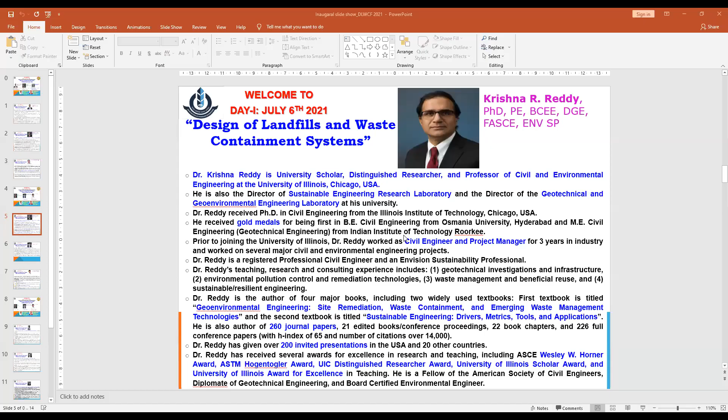So yeah, presently I don't have permission to share the screen. So maybe you will have it. Okay, you are sharing the screen. Okay, yeah, I'm sharing the screen.

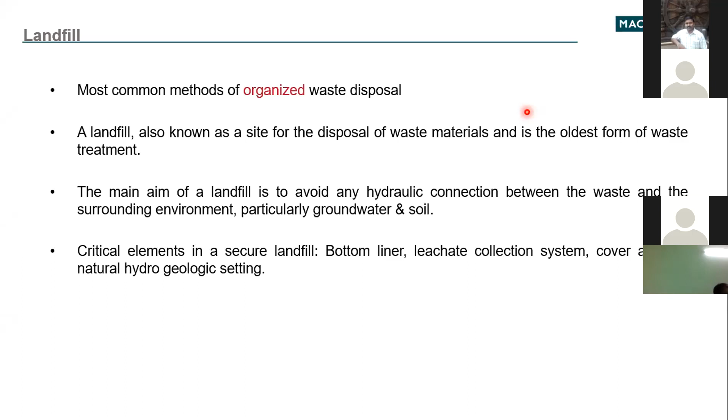Typically, you would have a bottom lining system, a cover or top lining system, and a collection system for the liquid generated in the landfill, typically referred to as leachate.

As you put this solid waste in the area, you will also require temporary covers. When dumping solid waste, you may not achieve the total height in a short period of time, but over a number of years. So between layers of solid waste dumped today, tomorrow, over a week's time, once you attain a certain height, you may cover it with soil daily so that odor does not come, especially if you expect working during monsoon, because during monsoon we cannot stop the waste from being generated—it is continuously generated.

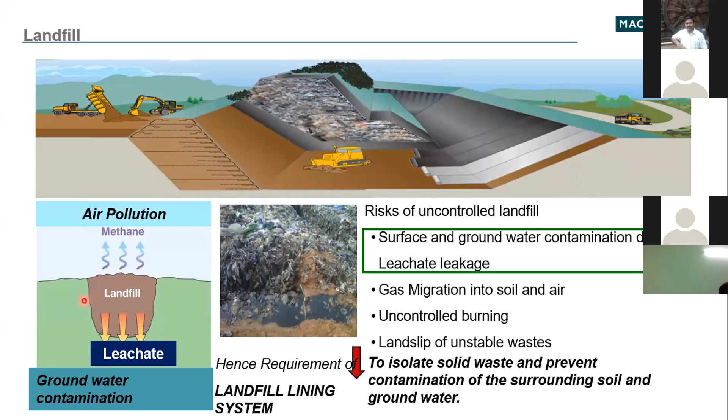So these kinds of risks are always there when we are doing uncontrolled landfill. So how do we look at this landfill, and how can we control the movement of these liquids, gases, and keep them in a controlled environment?

I would say the waste is getting confined in a particular place. So there could be a cap barrier, top lining, or top cover. So basically you have a landfill, you have a base barrier, here you are putting the waste, and then you are putting capping. The capping could be temporary or permanent. Once the capacity of the landfill is over, then you put a permanent top lining. When you are filling this landfill routinely, there you will have some temporary covers.

So the purpose of this top lining system is basically to control the moisture infiltration in the waste, which could be probably due to rainfall. It also collects the gas, because once the landfill is sealed and a top cover is put, it will generate a lot of gases. It collects them, prevents odors and sources of disease. Once you have the top cover, you control the bad odor getting spread, and it is contained in the landfill itself. It also meets erosion, aesthetic, and other functional requirements. Once the landfill has exhausted its capacity, you put a top lining system, and we may put some greenery on top, or develop recreational facilities. So that could be the requirement.

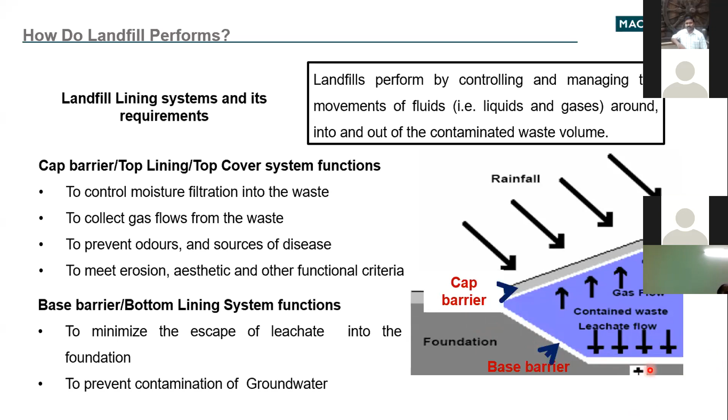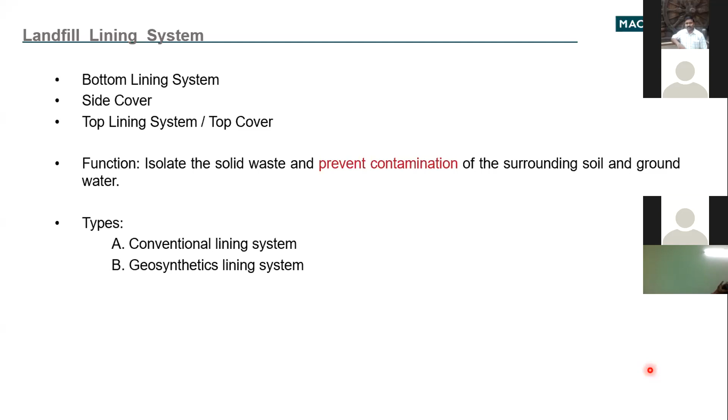The bottom lining system's purpose, of course, is to minimize the escape of leachate into the soil or foundation layer, and prevent contamination of the groundwater. So you can say there's a bottom lining system, side cover, and top lining system - these are basically three types of lining system. And here you can have a conventional lining system, or alternatively a geosynthetic lining system.

So why these geosynthetic materials have been used is basically because it is noticed that they are easier to handle, and low cost installations are possible. They are of higher and constant quality.

Just to give an example, if we talk of a clay liner, you will need to have consistency of the clay throughout the landfill. And you know, the clay we are going to get is a natural material, and we will be borrowing it, so there are processes involved. For that, of course, you will need to ensure the quality, consistent quality.

Whereas if you use alternative materials which are factory made, they are produced in a controlled environment where you can check the quality routinely, and you will get a constant quality throughout the production.

Then of course, when we have these landfills maybe near soft soils, or let's say coastal areas, areas prone to settlements, this provides good resistance for settlements. Overall, you can say you can even increase landfill volume - that I will cover in the reinforced soil structure, how we can increase the volume of this landfill. And then of course, because of the reduction in consumption of natural materials, you will have a reduction in the carbon footprint as well.

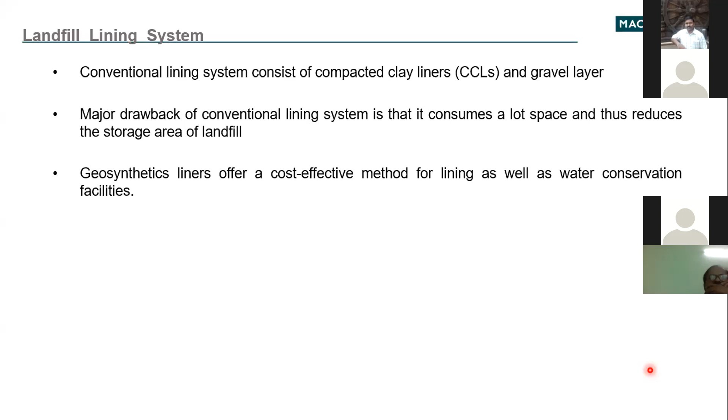These geosynthetics, of course, offer less thickness, so you have a good amount of space being utilized for additional volume of the solid waste.

This geomembrane is basically a membrane made from high density polyethylene, which is produced from crude oil. You have crude oil which is processed to get the required fuel, and the rest of the part is processed further, giving you different polymers like polyolefins, including high density polyethylene. So basically it's an engineered plastic sheet, and it comes in a thickness ranging from 0.75 millimeters to 2.5 millimeters. Typically in landfills, the minimum thickness goes up to 1.5 millimeters.

Some countries like in Europe, they go for minimum 2.5 millimeter geomembrane. On top of that geomembrane, you will have a protector layer. This geomembrane is a plastic sheet, so it is quite possible that it may get punctured.

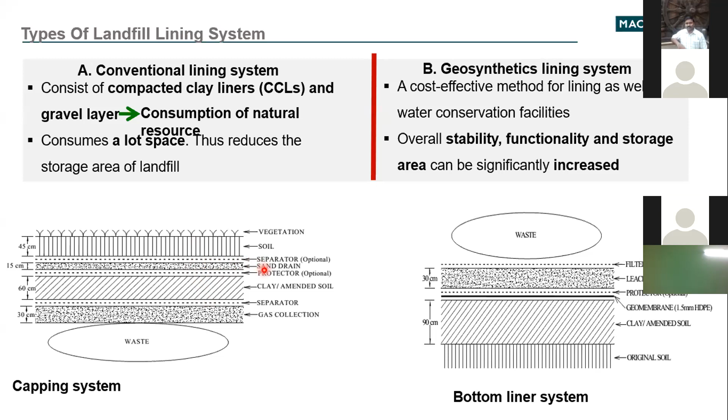The purpose of this soil is to promote the growth of vegetation, and the purpose of vegetation is to stop the erosion of the soil. So to stop the mixing of the sand, the soil, and the bottom clay, you will again provide a separator there. This depends on part of the design, but this is really a nice combination. If you provide this, you will have a good capping and bottom lining system.

When we look at what are the alternatives for the conventional layer, from the bottommost, let's say you have a clay liner, typically very low permeability clay to be used, 10 to the power minus 7, minus 8, minus 9, whatever you are able to get, that will be the best suitable, with thickness ranging from 0.6 meter to 1 meter based on the requirement.

This can be replaced by GCL. GCL is called a geosynthetic clay liner. So what is the geosynthetic clay liner? You have 2 layers of geotextile, 2 fabrics, typical textiles, and in between you put bentonite. The bentonite that is put inside is a very specific bentonite, typically a granular bentonite having good swelling characteristics.

So the thickness of the GCL can be at max, let's say 10 millimeters, not more than that. Then you have a geomembrane layer, as I explained, 1.5 mm, or as per regulation it could be 2.5 mm, followed by a protector layer. Typically, you may put a sand layer, or better, a non-woven geotextile.

A non-woven geotextile of good thickness would provide good cushioning, so that the geomembrane is protected, followed by a leachate collection layer of typically 1 foot. This can be replaced by a drainage composite, which I will explain further.

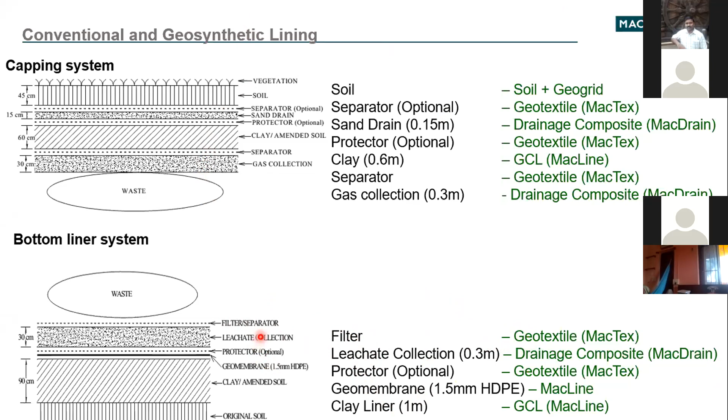Now when it comes to the lining system, what we typically call the bottom lining system - sometimes people refer to it as a simple or single lining system. These single or simple lining systems are typically used for low vulnerable sites, or pre-treated domestic waste, where you segregate the waste and treat it somewhere before disposal.

Whereas the other system is called a double lining system. Here you are providing two sets of linings, and these are used for vulnerable sites, untreated waste, or hazardous waste.

For example, industrial waste - say an aluminum refinery processing bauxite generates red mud, which is very hazardous. If you want to contain such material, you may go for a double lining system to ensure no hazardous material seeps into the ground causing contamination.

That's what a vulnerable site means - a site where you expect movement or settlement, or you're unsure the lining will stay intact for a longer time because of the terrain or geology. In such cases you may go for a double lining system. So you have a choice between single or double lining systems to put in place.

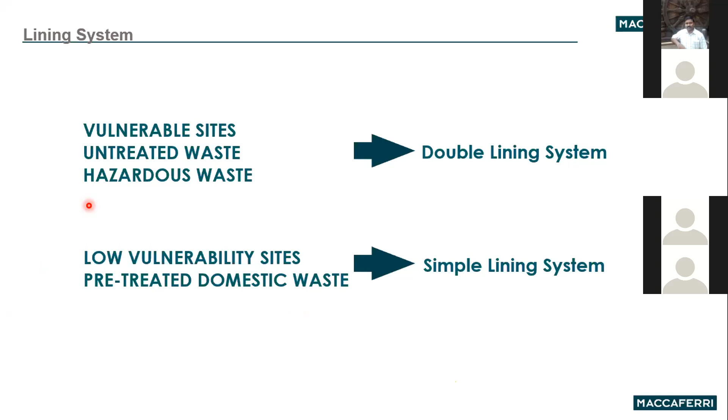When you look at the landfill, there are various requirements where geosynthetics would be used. First, of course, is waterproofing - meaning you don't want the leachate to go down. Second would be leachate drainage, as we discussed with the drainage layers, using geosynthetics as alternative materials in these drainage layers.

Protection and separation - this means geomembrane protection and separation, protecting whatever geomembrane you put in to contain liquid from any damage, using geotextile. Filtration is another requirement, where you want to filter the leachate so only the liquid passes through, using a gravel layer or drainage layers to handle this filtration purpose.

Sometimes you don't have much space for the landfill, because on top of a landfill you'll typically have a very flat slope due to the characteristics of the waste itself. If you provide a steeper slope instead, you may need solutions for retention of the solid waste. That could be one more requirement.

Or you are in a very poor site condition where you want to improve the site's geological characteristics - you may use geosynthetics for that too. So for all these applications, you can use geosynthetics.

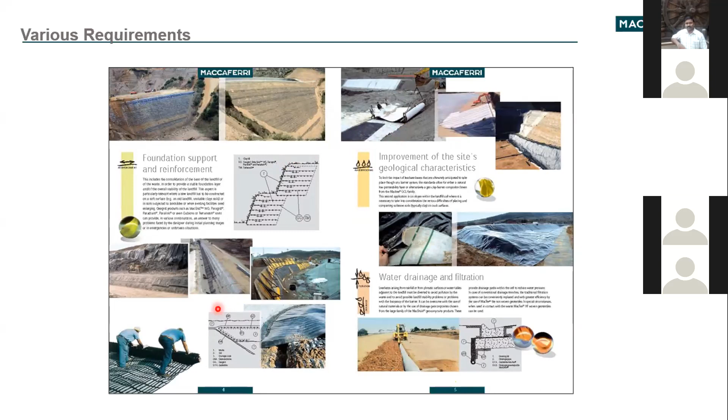According to European standard, when we look at the capping system, it consists of a vegetation cover, a drainage layer, a low permeability barrier layer, a biogas layer for collection of gas, a leveling layer, and the waste itself. So this is typically a capping system.

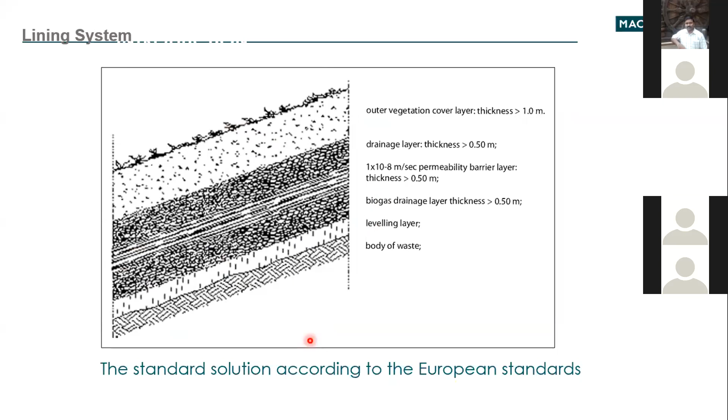If you look at this drainage layer plus the gas layer and the top vegetation, the thickness could be around 1.5 meters. Whereas if you use geocomposite drains and GCLs, you may achieve a thickness of just 0.03 meters - saving almost 1.5 cubic meters of space per square meter of surface area.

You can say you are saving, or creating, space - whatever way you want to put it. One of the challenges you can ask any municipal corporation is how to handle this waste and how much waste can be handled in a minimum footprint. That is one of the requirements, and with geosynthetics you can create greater space within a given design.

Now let's look at the bottom lining and the drainage, as well as the reinforced soil. Let me switch over to the other presentation.

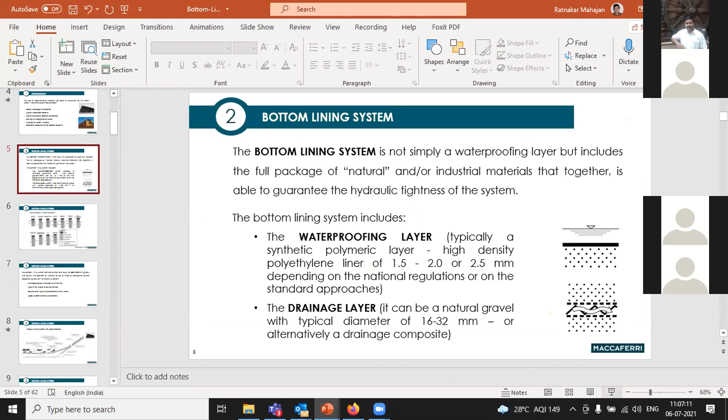Okay, so here I will be touching on the bottom lining system, drainage layer, and the reinforced soil. Just to give you an idea about the different bottom lining systems practiced in Europe as well as, you can say, USA.

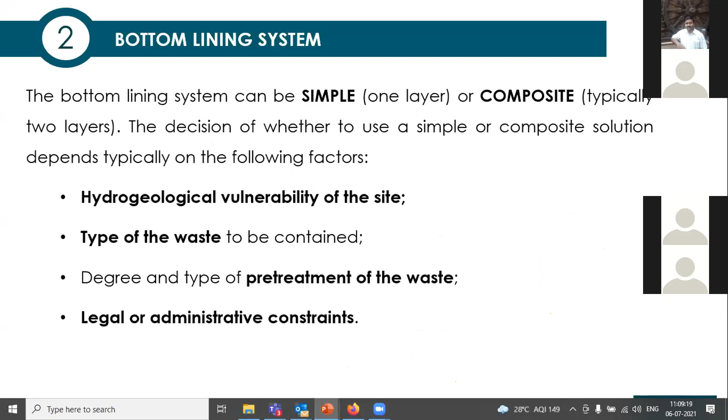So if we have to look at this bottom lining system, you have a waste, this is the bottom portion of the landfill. You have a clay layer, thickness could be 1 meter. Clay on the flat surface is fine, you can easily compact it. But when you are going on the sides, which could be at an inclination, how can you compact this clay? It's very difficult.

So they can be replaced with this geosynthetic clay liner, GCL, typically referred as GCL, which can be placed on the slopes very easily. The geosynthetic clay liners come in a roll form, and typical weight of these GCLs could be around 4 to 5 kg per square meter. Because of such high weight, the length of this roll is typically around 50 meters, and width could be around 2 to 4 meters, depending on the site requirement, but usually it could go as wide as 4 meters. So in this you will see there are two dotted lines, top and bottom, these are nothing but the geotextiles, and in between you have the bentonite being placed in.

So you have this geosynthetic clay liner. Then the solid black line, what you see, is nothing but a geomembrane. The purpose of this geomembrane is basically to form a barrier for movement of any liquid inside this clay layer or GCL. These geomembranes are made up of high density polyethylene, and they also come in the form of rolls. The width of this roll can vary from, let's say, 4 meters to 7.5, 8 meters. Now manufacturers have come up with very wide rolls up to 7.5 meters.

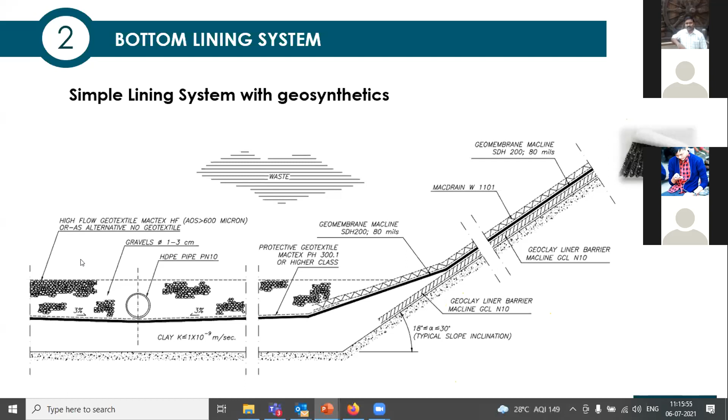So the purpose of the drainage layer in the simple lining system is to convey the drain or leachate. The HDPE membrane, basically not less than 2 mm, or 2.5 mm in Europe, has the purpose of containing the leachate.

And typically the clay layer, or mineral layer of low permeability, is 10 to the power minus 9. The purpose of this is basically to form the first barrier between the foundation soils and the solid waste.

Now let's look at the composite or double lining system. So you have exactly the same thing as the single lining system, with the clay layer replaced by GCL on slopes. You have a geomembrane, followed by a geotextile, and then basically a geocomposite drain.

The double lining system basically repeats the whole combination one more time. So a layer of GCL, a geomembrane, a geocomposite drain. Now the purpose of this additional layer of drainage and membrane is basically that even if one liner gets damaged, you will have a second assurance for controlling the leachate.

So the thicknesses, as I explained, will be more or less the same, no change. It's only that two layers are being put, and the purpose of the second geocomposite drain's bottom layer is basically to check or detect any failures in the first lining. So is there any failure there?

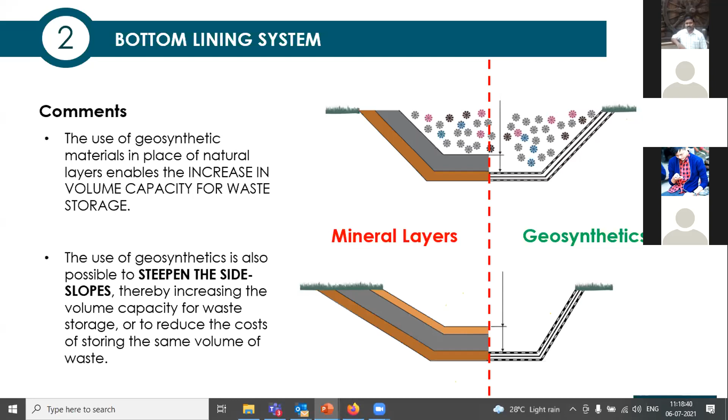There are many experimental and site experiences that show that when you use non-woven geotextile, which is randomly placed fiber, versus woven geotextile, and when we use these geocomposite drains in contact with solid waste, typically these non-woven geotextiles tend to clog.

Whereas if you provide woven geotextile for the drainage composite, they perform better compared to the non-woven ones. That is what experience shows, and this is a very important part which usually gets ignored by most people due to ignorance or not knowing the subject. For use of this geocomposite, you must use polyolefin-based materials only, because they have good resistance to acidic as well as alkaline conditions. Since there will be very aggressive conditions, polyolefin is preferred.

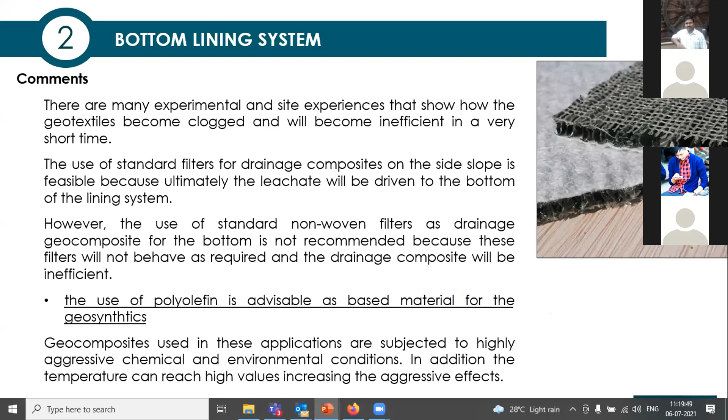Now coming to the drainage composite, I want to touch upon some detailed parts of it—specifically how a 0.6 meter thick, or maybe 2 foot thick, drainage layer can be replaced by only a few millimeters of drainage composite. How is it possible? Let's go through this.

This drainage composite has three components: two geotextiles and a core. These geotextiles could vary, like one woven and one non-woven. In this picture, you see one geotextile on one side and non-woven on the other side. Here both sides are non-woven geotextile. Here you see a different kind of core—a U or maybe W shape, or a random punched net.

Again, you don't always need two geotextiles—you can have only one geotextile on one side, with nothing on the other side. It depends on the application. For example, if you have a chamber to collect leachate and need to provide a gravel layer around it, instead of that you can use this geocomposite drain with only one side geotextile.

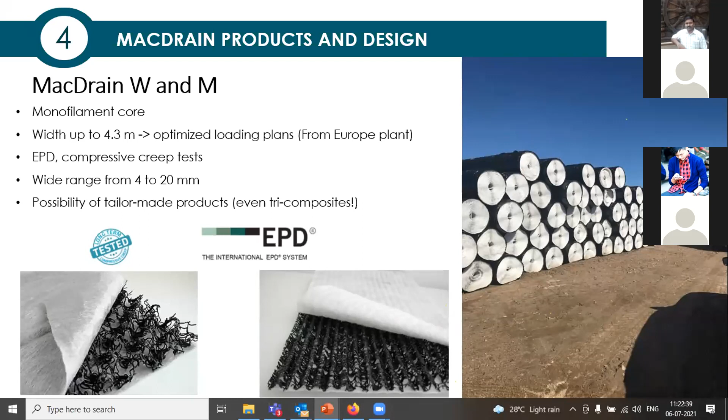So there's a possibility of having a geocomposite drain with permeability on both sides, or impermeable on one side, depending on requirements. They come in a wide range—as explained, around 2 to 4 meter widths, typically coming from European plants. The thickness ranges from 4 mm to 20 millimeters, and this can be customized based on project requirements. During manufacturing, there's a possibility to customize the thickness, the type of geotextile, or geomembrane to be used.

So let's look at this product's design. You have this capping system—let's say you're putting two layers of draining layers, the bottom one for gas and the top one for liquid. You may try to find the amount of liquid that will flow through these layers using a simple equation: KAI, where K is the permeability of the mineral layer, or drainage layer.

You can assume it's, let's say, 10 to the power minus 3, but of course it depends on the type of material used in the draining layer. Then there's cross-sectional area A—for this case, if it's 0.5 meter thick, you can have a cross-sectional area of 0.5 meter square. And I is the gradient related to the inclination of the draining layer, typically called the hydraulic gradient. In case of slopes, that I could just be sine beta, where beta is the inclination of the draining layer with horizontal.

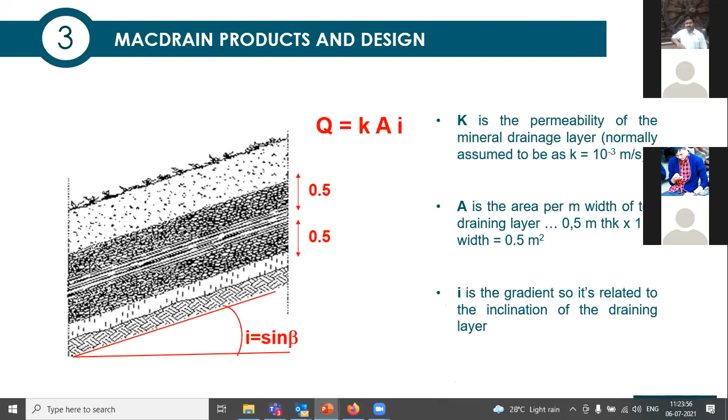Once you know this flow through this drainage layer, we can now design this geocomposite drain. When you design this geocomposite drain, you must understand the water flow capacity, which can be measured in the lab simulating the field conditions.

What are the field conditions? First is this geocomposite drain will be in contact with certain type of material. Let's say you have a geocomposite drain here in touch with a GCL, which is in touch with a ground layer or subgrade, and on the other side a GCL and solid waste. Whereas another geocomposite drain is in touch with GCL, geocomposite drain, GCL, then subgrade, and solid waste here. So you have different stiffnesses and different kinds of surfaces.

Even simpler, let's say you are installing this geocomposite drain on a retaining wall or a leachate chamber. So you have a concrete surface on one side, solid on the other. This is what we call the type of contact it is in touch with.

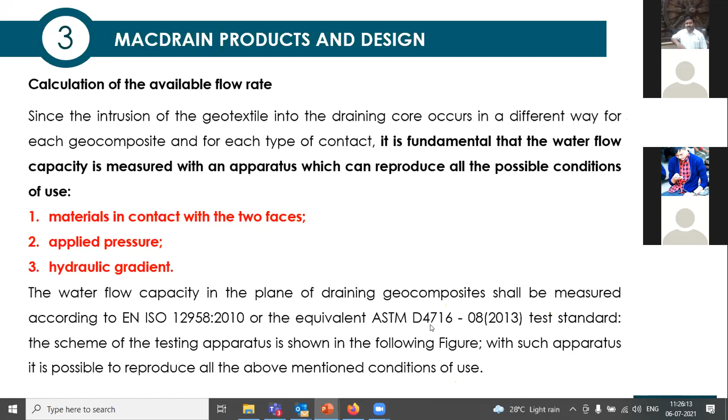So you must be able to estimate the water flow through this geocomposite at different conditions, which can be determined by a test procedure given in EN ISO 12958 or ASTM D4716. So you have rigid to rigid contact, soft to soft contact, and rigid to soft contact - that's the type of contact I mentioned.

When you have a geocomposite drain between two rigid surfaces, this defines a rigid to rigid contact - like a GCD for leakage detection in landfills between two geomembranes. If you have two geomembranes, top and bottom, it could be rigid to rigid contact, or between shotcrete and the structural arch of a tunnel, it could also be rigid contact.

Rigid soft contact could occur if you are using this geocomposite behind retaining walls, or in a capping layer - you have soil, then the capping of the landfill with top soil and a drainage layer, or using it in a roof garden. Soft to soft contact could be draining crates, or roadways, parking areas, different conditions. These different contacts would be there.

This is how you calculate the in-plane flow capacity of the drainage composite. Through this sketch you will understand: you put a drainage composite here to simulate the type of condition. Let's say you are simulating a rigid condition, you will put a steel platen. If you want to simulate a soft condition, you may put a rubber top and bottom.

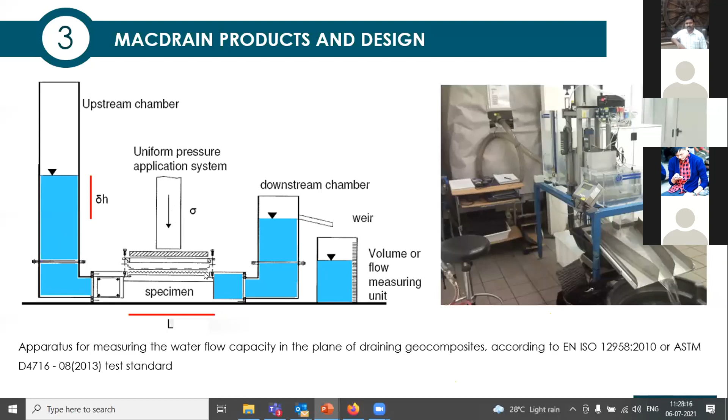Then you have a facility to apply a normal pressure, determined based on site conditions. So you place this geocomposite with proper surface conditions, apply the normal pressure, and then decide the gradient - you know the difference in head, that is delta H, and this L. Whatever hydraulic gradient you want to achieve, you achieve it. You have a constant water flow, achieve a laminar condition, achieve this delta H, and then measure the amount of liquid passed through this composite to get the in-plane flow or water flow capacity of this geocomposite.

This capacity of the geocomposite drain will be different for the same geocomposite at different normal pressures, because it is made of a synthetic material - say 50 kPa, 100 kPa, 150 kPa - thickness reduces at higher pressures, so naturally the in-plane flow rate reduces with increase in pressure. The same applies with the hydraulic gradient: higher the hydraulic gradient, higher the flow through this geocomposite; lower the hydraulic gradient, lower the flow through it.

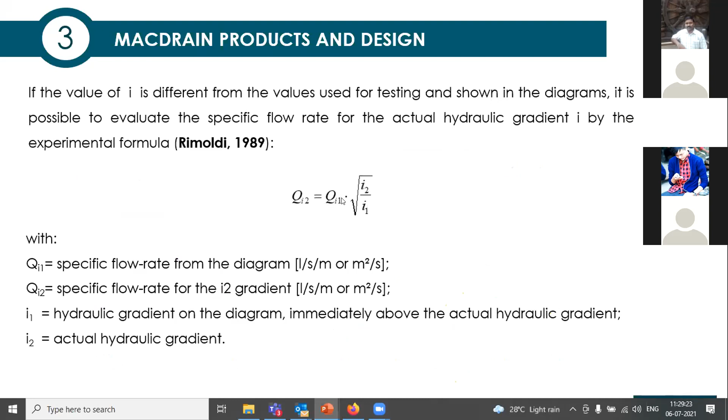Once you determine this flow rate in the field, there's a different possibility of different flow at different hydraulic gradients - still, you don't have to do the same test again. This is a formula given by Rimoldi in 1989. You know the flow for one hydraulic condition, and want to determine the flow for a different hydraulic condition, let's say I2. So you simply take the square root of I2 by I1, multiplied by Q, where Q and I1 give you the flow at the original condition.

When you do the test in the laboratory at 20-degree temperature, if you're testing at a different temperature, you need to apply a simple correction for temperature and viscosity of the liquid.

Now, coming to the very important part, is only this condition enough to test and determine the flow through drainage composite? No, it's not enough. We need to understand this landfill would be there for a certain amount of time, and this geocomposite is subjected to these pressures for that time.

So you need to account for the effect of varied stresses and conditions over a period of time. Basically they are accounted for by reducing the flow obtained in the laboratory. This is QL. Basically you get the flow in the laboratory, and you want to estimate the flow through this geocomposite for a long term, let's say 10, 20, 40, or 50 years. How can you estimate this?

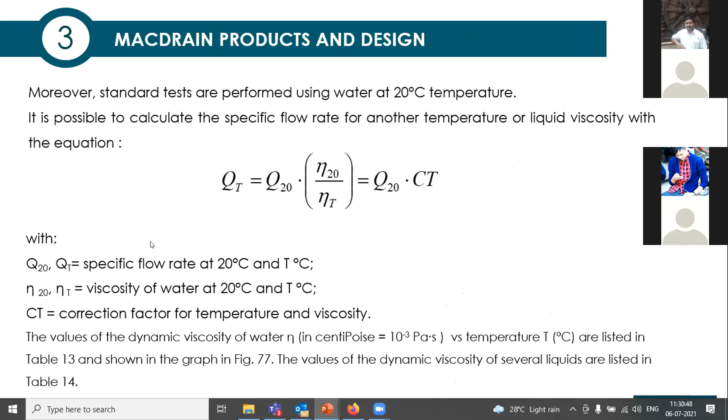So you get a flow through this composite in a laboratory that is reduced by certain reduction factors. That is the reduction factor for intrusion. There are geotextiles, so you have a geotextile like this on the core. It will intrude into the draining core, which will reduce the cross section. So that's the reduction factor for intrusion of a geotextile.

Then there's a reduction factor for compressive creep. This geocomposite will be subjected to pressure over a constant period of time. There will be some reduction in thickness because of the compressive stresses, or compressive creep. That's the reduction factor for creep.

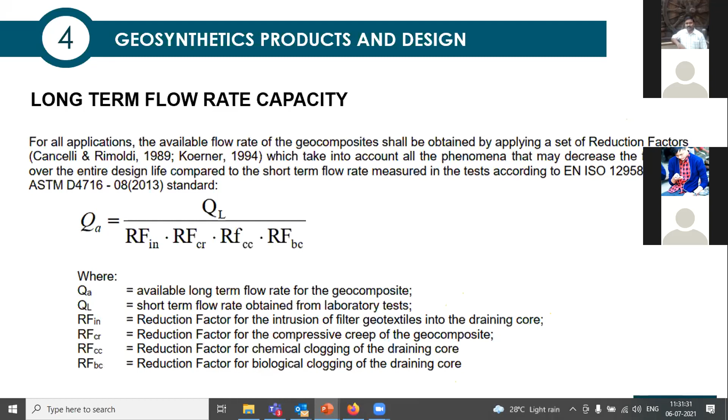Reduction factor for chemical clogging and biological clogging. Because of the leachate flowing through, there are possibilities of chemical and biological clogging. Typically in case of leachate, biological clogging is quite prominent, and it can further reduce the flow. So you need to estimate all these reduction factors by proper testing.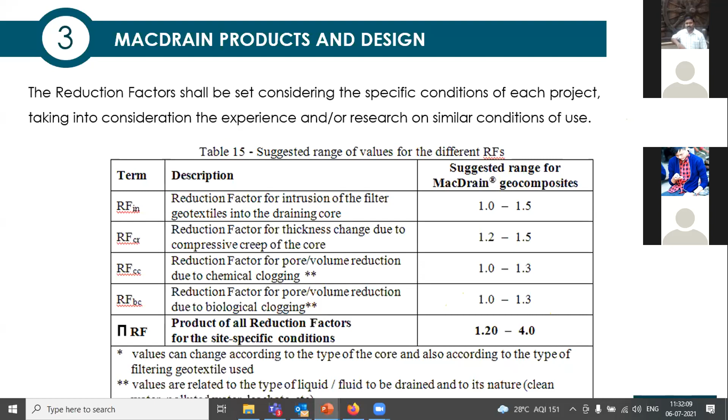You will find a range for this geocomposite drain. There is a very detailed chapter on how the type of core affects the performance of the geocomposite, and the type of geotextile. So you can perform additional crush tests, compressive creep tests to get these factors and decide.

Then you can find out the equivalency of the mineral layer and the geocomposite layer. So you know the flow through the layer that we just calculated, KIA, and you know the available flow in the drainage composite. You can put an additional factor of safety on top of that, and then proceed.

An important part in doing this analysis is the value of this K. A is known, I is known. K is a very important factor, and this is a sensitivity analysis done for a layer with different K values. Just see, this is 10 to the power minus 3, 5 into 10 minus 3, 1 into 10 minus 2. Just see the difference—very much important is your K value.

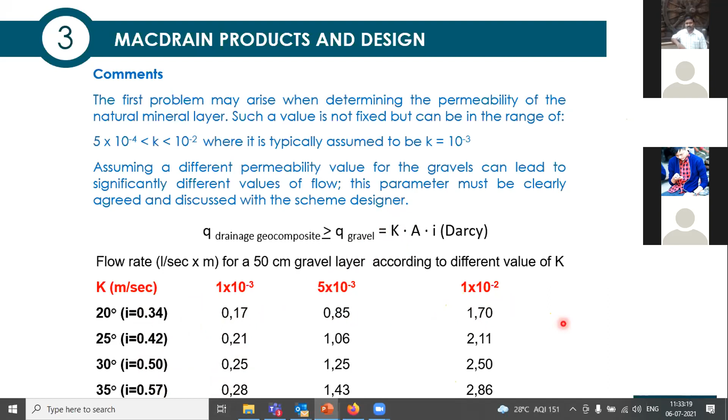If you vary the inclination, or the gradient, there's not much variation, but here you have quite a variation when there is a change in the K value. So it is very important that you must estimate proper K and proceed accordingly.

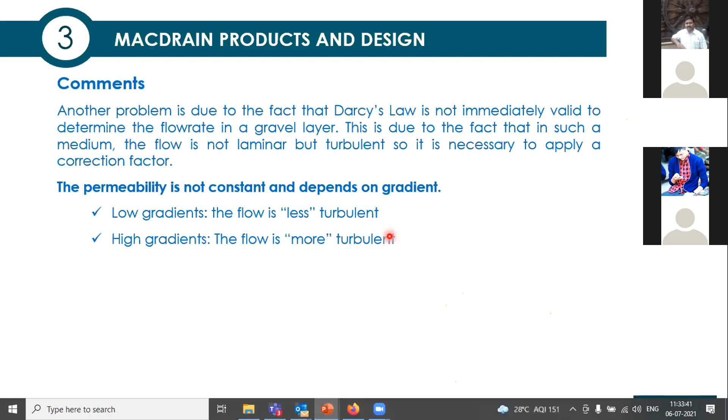An important part is when we are looking at the flow through the gravel layer, Darcy's law is not immediately valid, because when you have low gradients, you have less turbulent flow, and when you have high gradients, more turbulent flow. So it is necessary to apply a correction factor while doing these calculations.

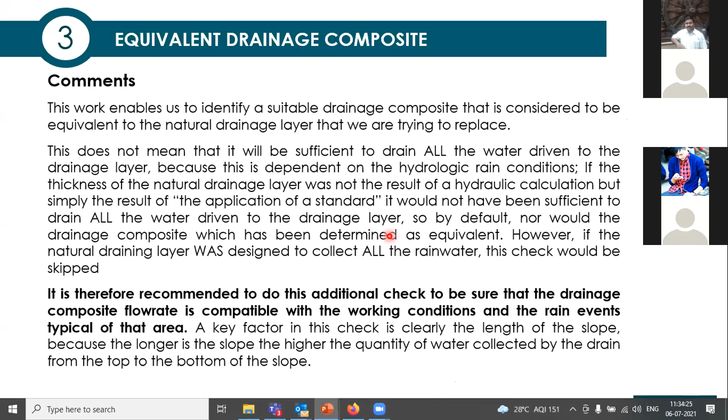Apart from what we have discussed about the drainage composite, typically in landfills, we need to take care, especially in cappings or even in bottom lining systems, whatever leachate we are seeing—apart from the thickness of the gravel layer equivalency, you need to add additional flow, typically from rainfall. So there is some rainfall happening, and you can calculate the amount of water getting infiltrated.

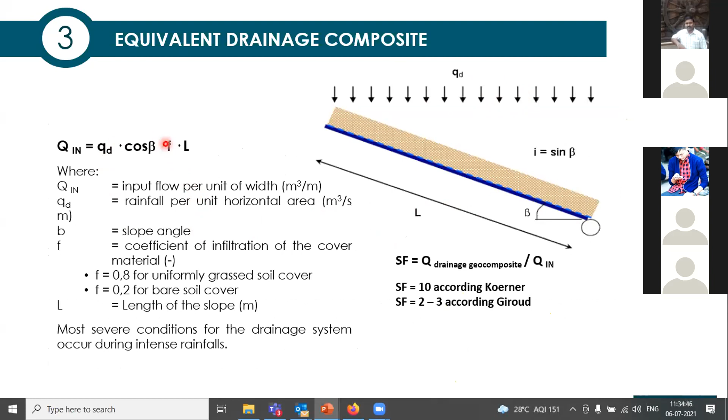You can assume some coefficient of infiltration. Typically for the cappings, if you are using a grass cover or simple compacted soil, you can have different coefficients, and you can estimate the water and add that in.

Now moving towards the topic of retention. When you have a landfill, let's say this is a cross section of a landfill—instead of the slope, if you want to just put solid waste, you may have a footprint something like this, but if you put retaining structures, you can go for a steeper structure.

So these reinforced soil structures can be used for steepening these landfills and reducing the footprint area. So basically it reduces your cost of land. This is the economical solution, and importantly, you can increase the landfill volume in a given footprint of the landfill. And even sometimes you can use the waste itself as a fill material in the reinforced soil structures.

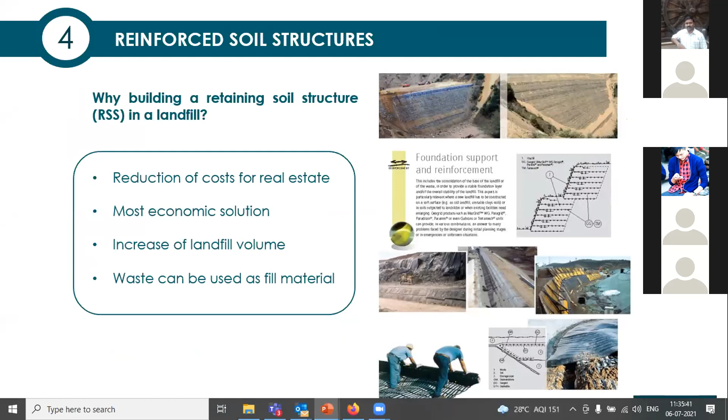If you want to use the waste itself as part of the reinforced soil structure, you will have to follow a certain scheme. So you will have a reinforced soil, this is a geogrid. You will have a vegetative soil, a fascia, and then you will have waste. You will need to separate the waste and the vegetative soil by a proper lining system.

First you will have a geomembrane. Here basically a geosynthetic clay liner would be preferred, then followed by a geocomposite layer for gas connection, and then of course the outer layer, basically a drainage composite layer for the connection of this, for the liquids what you may want to connect. And then you have in situ vegetative soil, and then you have the reinforcing geogrid. So this is the combination.

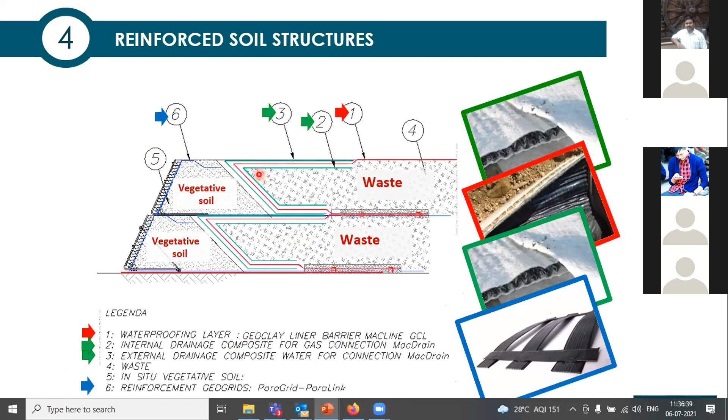Even you can use the waste also, there are possibilities to use this. So when we are doing these reinforced soil structures, what are the typical problems? Basically confinement, embankment stability need to be checked, waste mass stability, and then of course when we are going to have a final profile or geometry being achieved, that stability, and most important is the settlement checks, because you will have this solid waste being there, and you can expect some settlements.

Of course, when you are using the waste in these reinforced soil structures, you cannot use the waste coming from the urban area as it is, because you will have to use maybe a waste which has been there for a period of time, and then you can put it in there. So you can have slopes, you can use a reinforcement at the bottom, variety of possibilities are there.

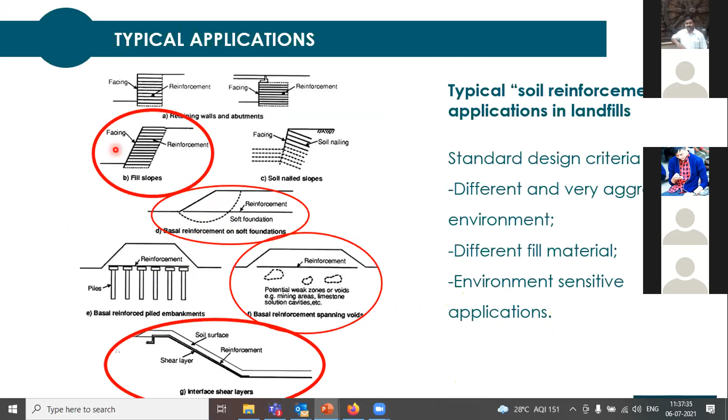Let's say we're talking of a fill slope where you want to put this. So when you are putting this reinforcement, basically what you need to estimate is the mechanical strength of these geogrids, the stiffness and the durability. And most important, what is the bond between this solid waste and maybe whatever fill you are going to put and the reinforcing material.

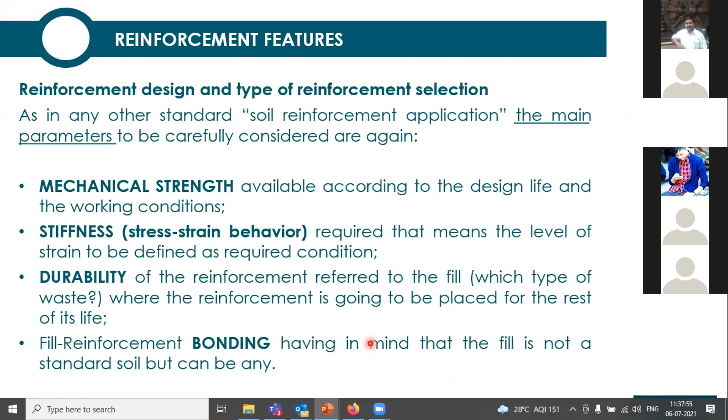So when we are talking of this mechanical strength, we don't have to refer to the short-term strength. What exactly we talked about for drainage composite - you have a flow in the lab, but you cannot use that flow as it is to determine the equivalency. You will need to estimate for long term. So same thing is for the geogrids, you need to estimate the long-term strength. So you test these geogrids in the lab, you get the short-term test, you apply some reduction factors, you get the long-term strength of the material.

This long-term strength will be depending on the type of environment these geogrids are being put in, the type of polymers, the temperatures they are exposed to. So very important is the design temperature. When we are talking of a design temperature, here you need to estimate design temperature, which is typically not the ambient temperature, but it is higher than that.

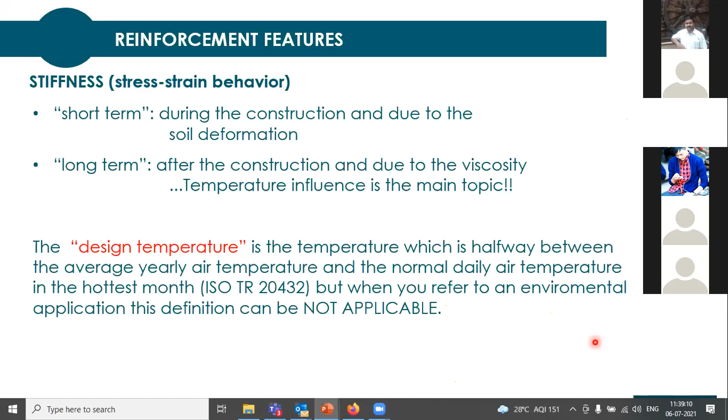And then ISO TR 20432 gives the guideline how to arrive at this design temperature for reinforced soil structure. Typically, it is average of yearly air temperature and normal air temperature for the hottest month. That's what you have to take. But for landfill...

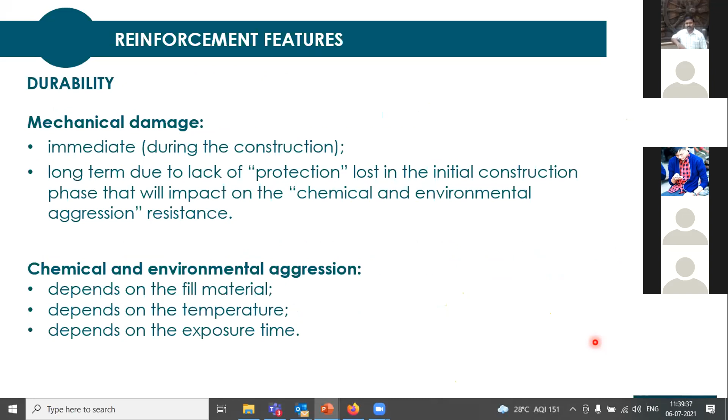Estimation would be required. Durability, of course, when we are putting this reinforcement in the soil, they will be damaged because of the construction, as well as when they are exposed to different kinds of chemicals, there will be some reduction. Apart from that, we need the bond between soil and the reinforcement, which will depend on the water, moisture content, and the compression or compaction of the materials.

So what is the difference between a typical reinforced soil structure and that are built for the landfill? So here in landfills, you will have to expect large settlements compared to the typical reinforced soil structures. The temperatures could be as high as 40-50 degrees. Typically, normal reinforced soil which we use for highways, it could be 25 to 30 degrees design temperature, not more than that. Durability issues need to be checked carefully, kind of environment it will be used, and then the moisture content needs to be properly estimated.

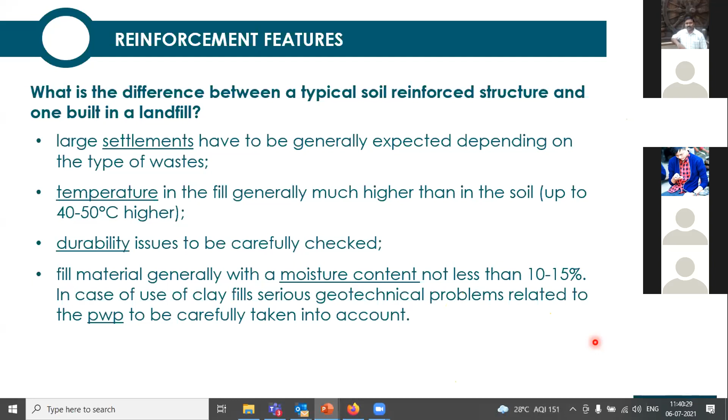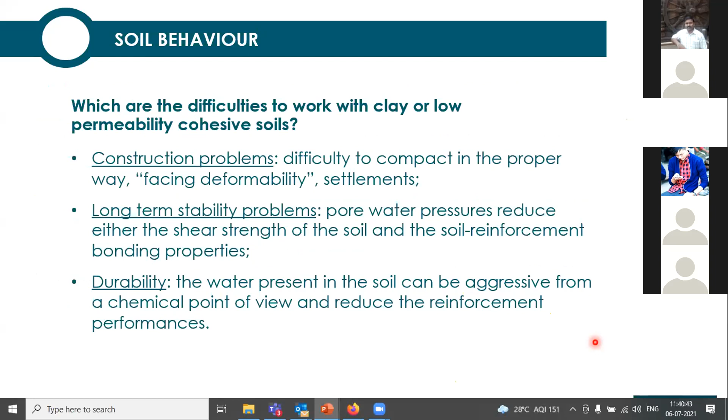Apart from pressures, we need to take care of construction issues and long-term problems, typically due to pore water pressure, and in the facing you may not be able to compact it properly. So a very important part: if you are using the reinforced soil structure in the landfill, you will need to use a cohesive material in the front, because you don't want leachate or solids passing through. In a typical reinforced soil structure you may use a free draining fill, but here you will need a cohesive fill, so you need to understand the behavior at drained and undrained conditions. Careful geotechnical analysis needs to be done.

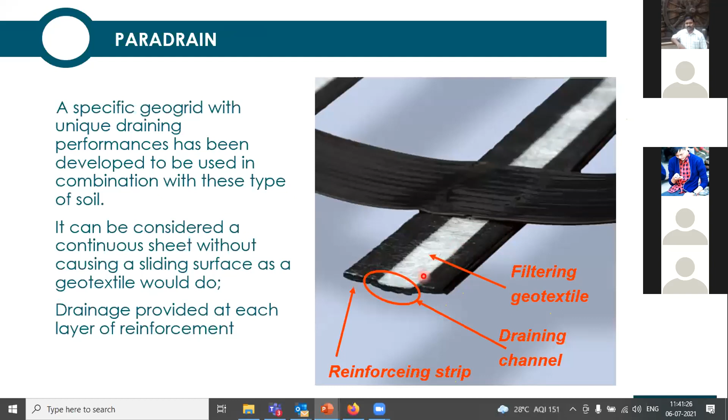You may put reinforcement which has additional capacity of drainage. There are products available where you can combine the drainage and the reinforcement together. How it typically functions is you have the soil being put, and then you have movement of water in the reinforced soil mass, and as the geogrids have additional capacity of draining itself, as time passes you will have a gain in shear strength because there will be a reduction in pore pressure.

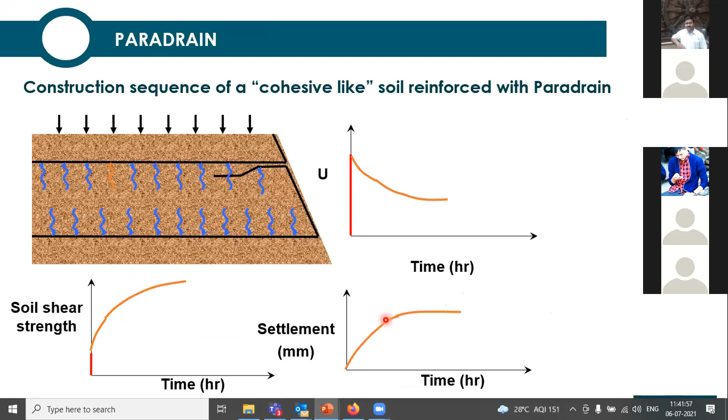As the waste itself is used as the filling material, you will need the best understanding of its behavior. Believe me, you cannot take references from the literature because each site may have a different kind of waste combination, and the behavior could be different. So you will have to do a study and understand the waste.

But to give some idea, what is interesting is that as the age of waste increases, there is a decrease in the phi value observed for some initial time, but there is a zone of overlap where the phi value is typically in between, for higher cohesion and friction angle. From laboratory tests and field tests, a typical range of phi value being recommended could be 15 to 25. But again, as I said, these are for particular sites referred by researchers; similar analysis could be carried out to understand the geotechnical parameters.

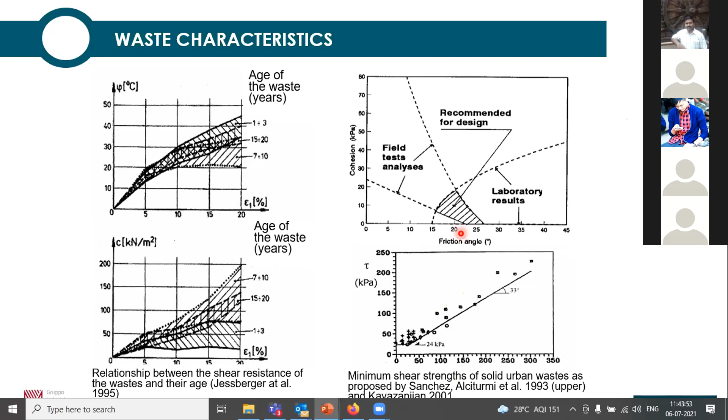So there is no straightforward answer to say this is the c-phi value you can take, because the kind of waste generated in, let's say, Delhi could be different, Mumbai could be different, Chennai could be different. When this data could be outside the country, so even country-wise there is a change in the kind of waste being generated, and some cities may have segregated waste, some may not, so again there will be variation. But you can study these geotechnical parameters for a particular site, estimate these parameters, and use this in the reinforced soil structure. I think we have already discussed this.

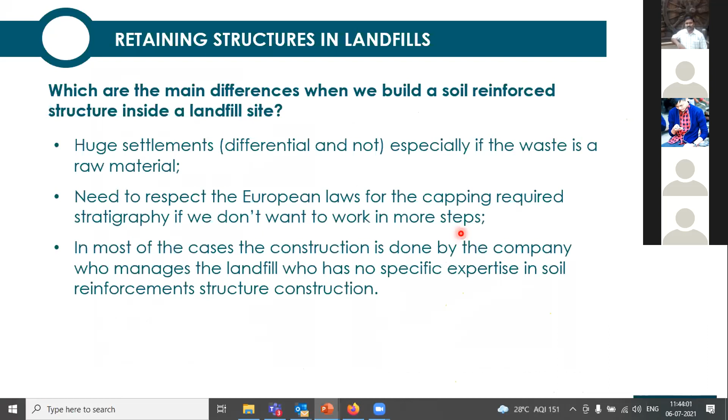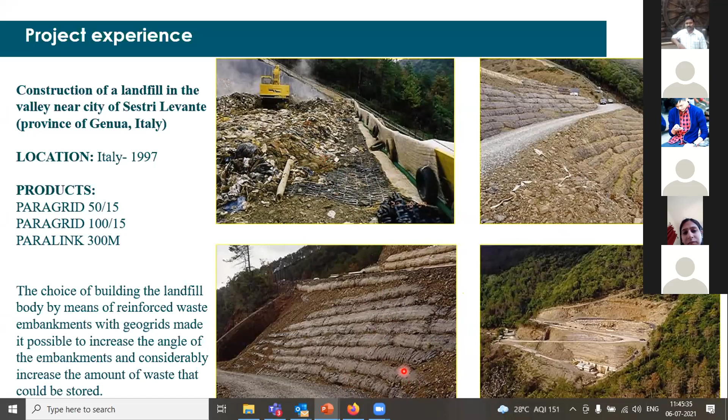This is another case, built in 1997, and here basically you will see what I was talking about. Waste is being stabilized with geogrids, so instead of soil, the waste itself is being used as the filling material. You can see here the geogrids wrapped around and put as the reinforced soil structure. You will see concrete blocks or panels, which are typically used elsewhere, are not being used here. The reason is you will have high settlement, so you need a really flexible fascia. You can wrap geogrid itself, or use a double twisted wire mesh which is flexible.

This is another case of a landfill from Italy, where a wraparound system is being used. This is basically a reinforced structure, and at the back you have the landfill area.

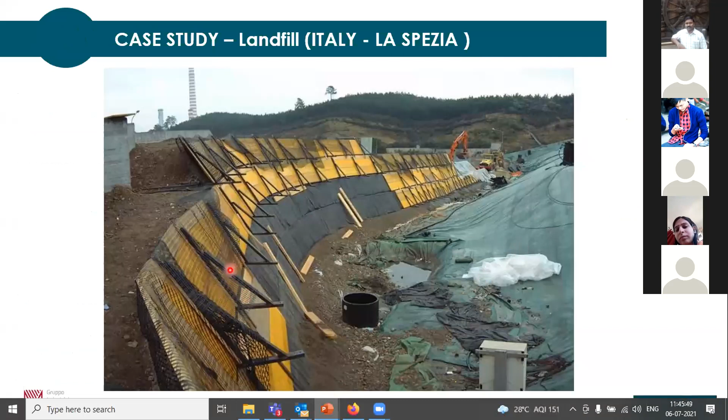I will just switch back to the previous presentation. So when we have discussed this reinforced soil structure, now coming back to the issue of replacement of 1 meter thick clay with maybe a 5 millimeter thick GCL, how is it possible? You can simply compare the permeability of the clay as well as the permeability of the GCL. Knowing the thicknesses, you can calculate the permeation time for these clays as well as the GCL, and you can really work out the equivalency of the GCL versus the clay, or clay versus GCL. It's quite possible.

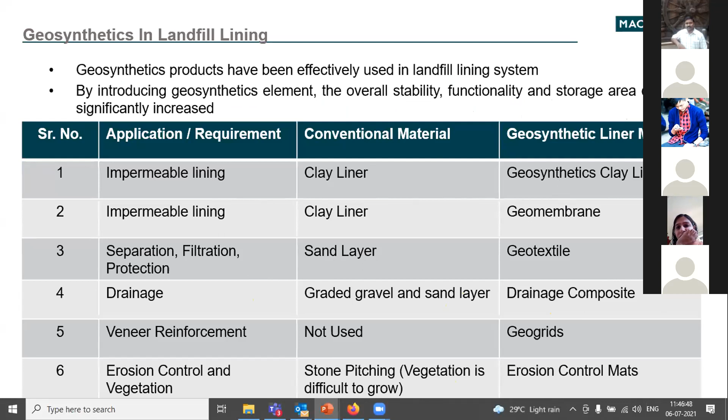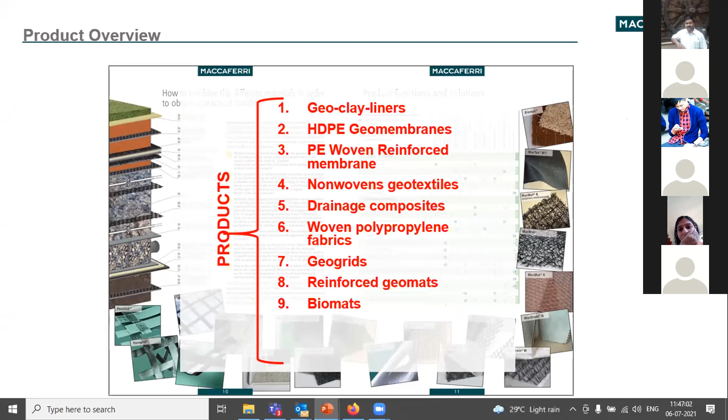All these are used in reinforced soils. I would say the landfill itself is possible with these.

If we compare the clay liners, in GCLs you can use bentonite, whereas in CCLs you can use native soil. Adding bentonite, hydraulic conductivity of GCLs could be 10 to the power minus 9 or 10, whereas for CCLs it could be 10 to the power minus 7. Thickness could be 7 to 10 mm for GCLs, or 300 to 900 mm for CCLs.

GCLs have rapid and simple installation. CCLs are slower due to difficulty in compaction, especially on slopes where it's challenging. GCLs are factory made, whereas CCLs use natural materials, so you need to ensure proper stringent quality checks at site. It's commonly used, but GCLs are easier compared to CCLs.

There's also an issue of desiccation. CCLs are typically nearly saturated and can desiccate during construction - that's one issue. Another issue is with 1 meter thick clay - the stability of it on slopes could be a challenge when you have sufficient moisture in it.

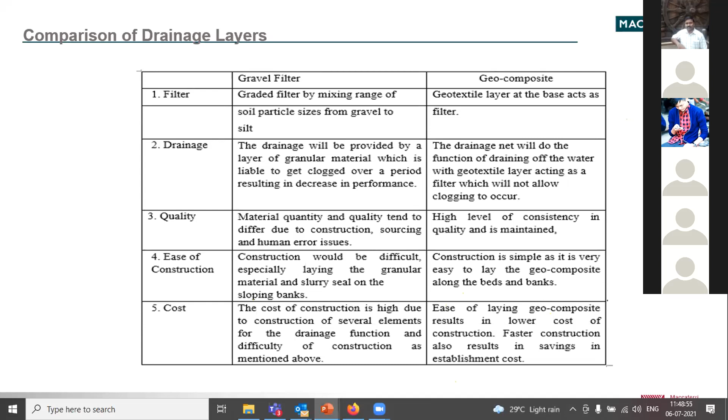For gravel and geocomposite, when using gravel layers you need a properly inverted filter. With natural material, quality needs to be ensured from sourcing to replacement, and there are possibilities of human errors, whereas geocomposite offers high consistency and quality can be maintained. Ease of construction is better with geocomposite compared to gravel filter, and of course cost - natural material cost is going high nowadays, whereas geocomposites are economical. Most importantly, less consumption of natural materials like clay or gravel is possible with geosynthetics.

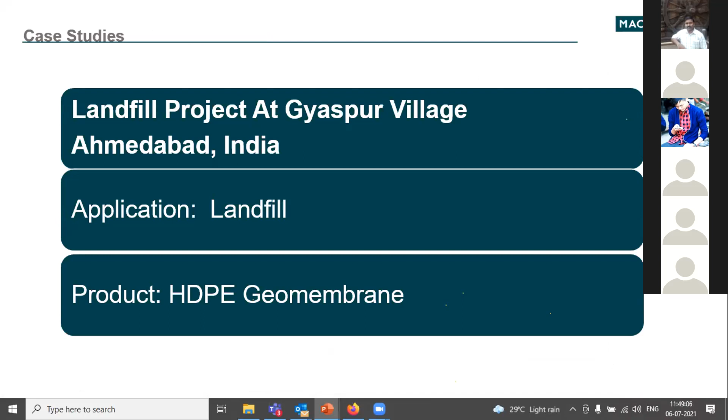I want to show some examples of HDPE membranes being used in India. This is a project from Ahmedabad. Here 1 meter of clay is there, followed by a 1.5 mm thick geomembrane, then a drainage layer.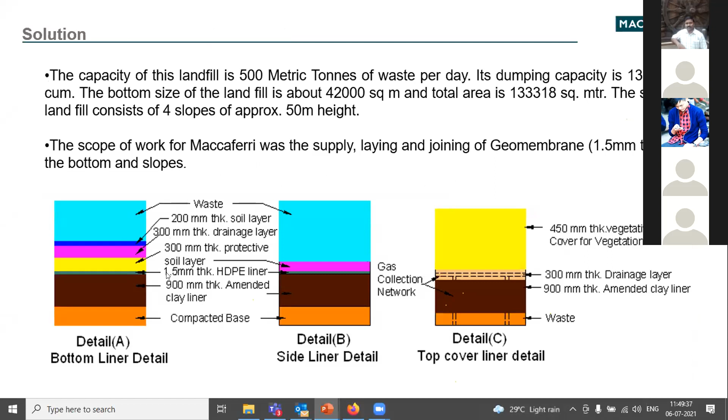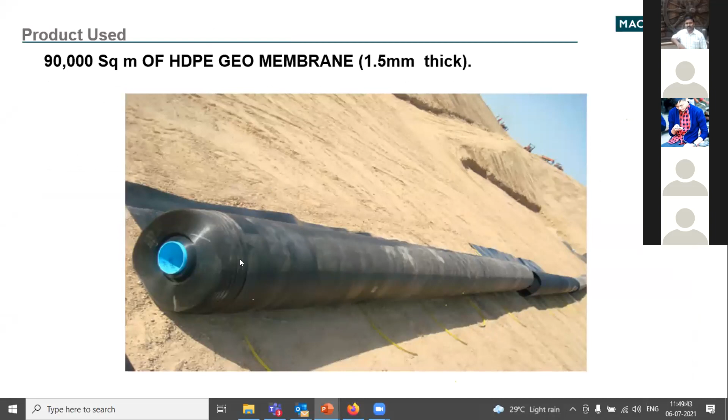Here I'm just showing the geomembrane installations being done. On the right, the black color things are the geomembrane. This was the bottom liner being practiced, where a membrane is put - only the membrane part was we were involved in. This is the geomembrane, typically a black color sheet, 1.5 mm thick being used.

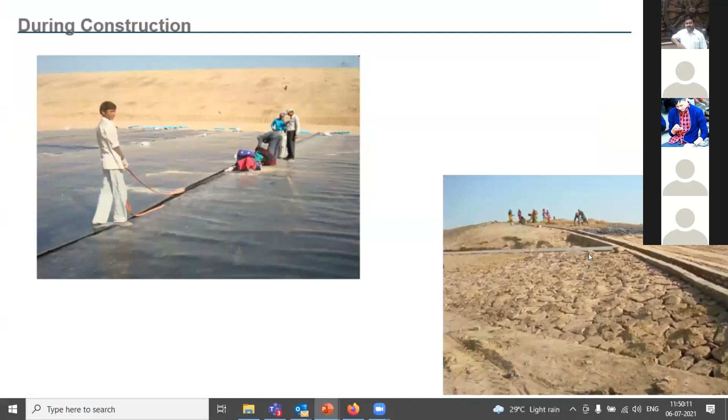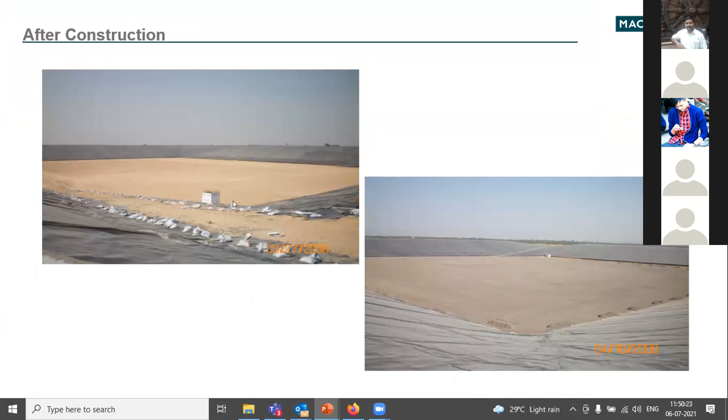This is the joining of these membranes - you have two layers of geomembranes placed on top of each other, and a welding machine joins these two layers of sheets together. This is a finished site where the geomembrane is installed all around, with a drainage layer at the bottom. The gray color box is basically a leachate collection chamber.

Another case study from Ahmedabad area, again for HDPE geomembrane. I'll skip showing the details of how installations are done - this is geomembranes laid side by side and then joined together.

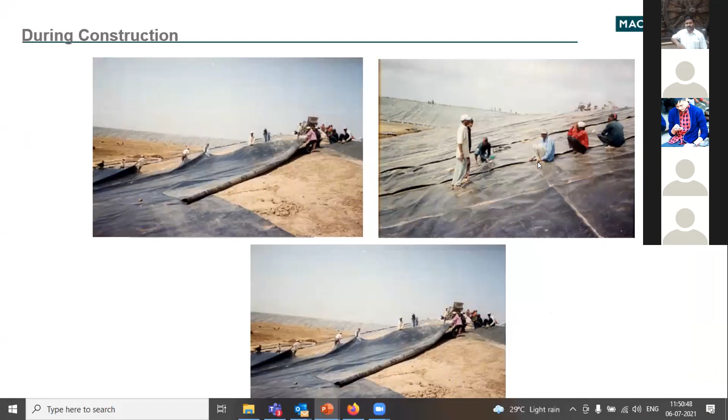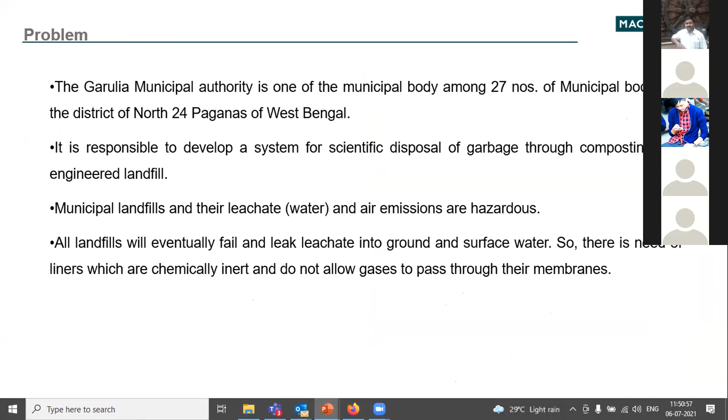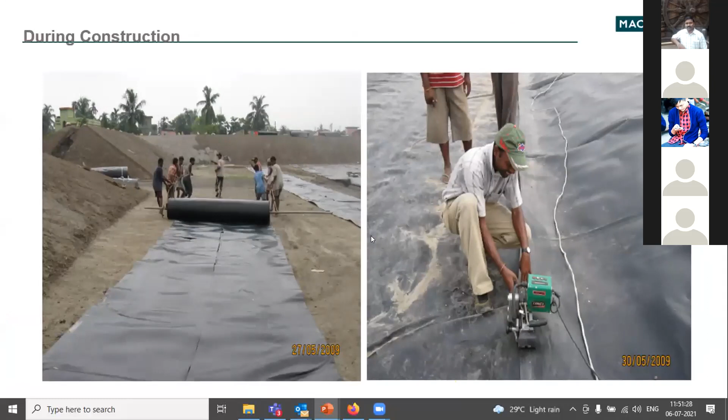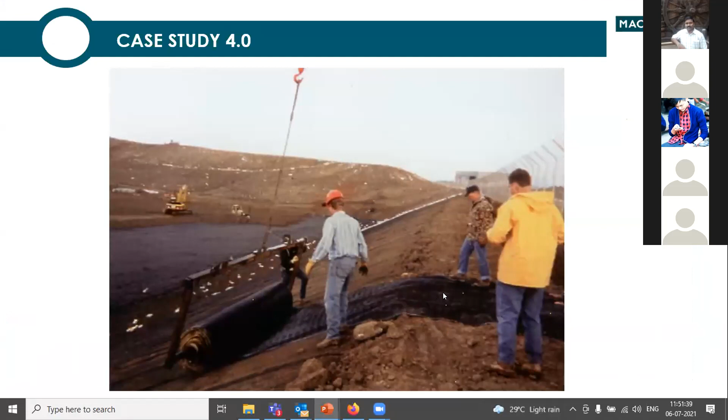This is a case study from Italy of a landfill - a capping in progress where a reinforced mat is being put for the growth of vegetation. The black color is basically a synthetic mat, and the gray color mesh is a steel mesh. The purpose of this synthetic mat is to stop erosion of the soil placed on the capping for vegetation purposes.

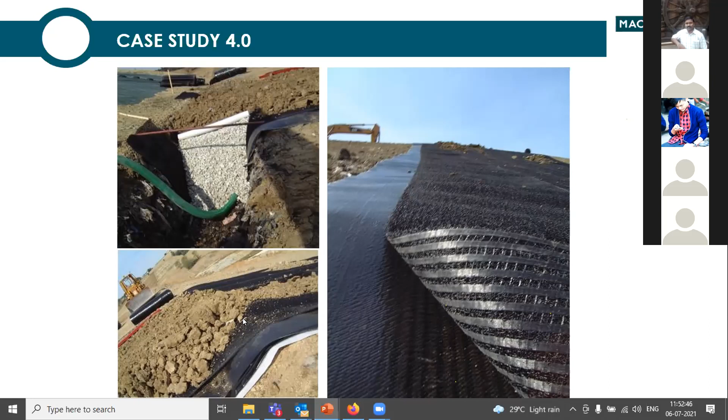This is a synthetic mat, and on top of that soil is being placed. This is a geomembrane, and at the bottom you have a geocomposite drain. The purpose of the geocomposite drain here is for a gas drainage layer. The purpose of the membrane is to stop movement of water inside the landfill. The purpose of this geomat is basically for veneer reinforcement and holding the soil, promoting the growth of vegetation.

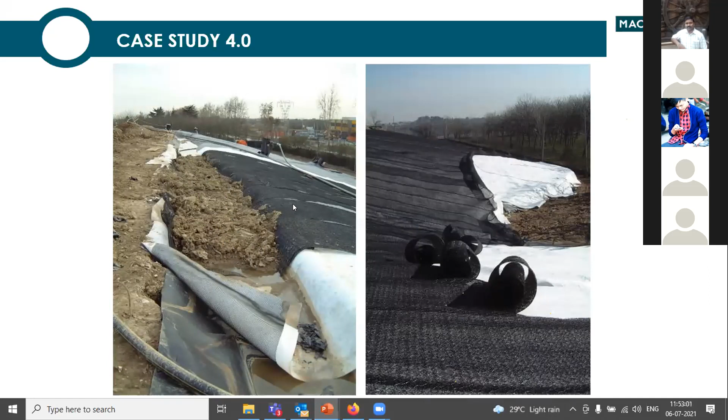This is the top anchoring. When you install these geosynthetic layers, at the top you have an anchor trench and place backfill into the soil, so that with this anchorage, this geosynthetic layer doesn't slide down.

And this is what the finished slope looks like. This is another photograph showing different layers. This is a geosynthetic mat, drainage layer. Then you have a GCL layer - this is basically geosynthetic clay liner. So this is the capping in place on the landfill.

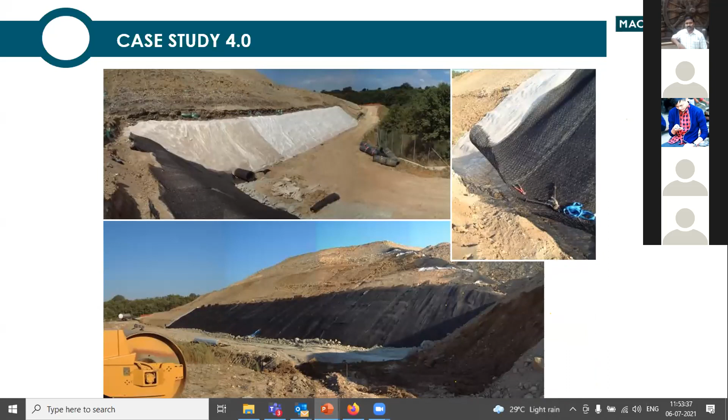Nowadays I have seen use of these geosynthetics in India, but still there is a large scope, or I would say big scope of improvement, for engineered landfills in India.

Overall, geosynthetics are cost effective and easy to handle. Geogrids, geostrips can be used for soil reinforcement in the landfills. Of course, these soil reinforcements provide adequate slope stability. You can use coir or jute mats on top of the landfill for growth of vegetation instead of synthetic. Overall, geosynthetics can help faster construction as well as easier construction.